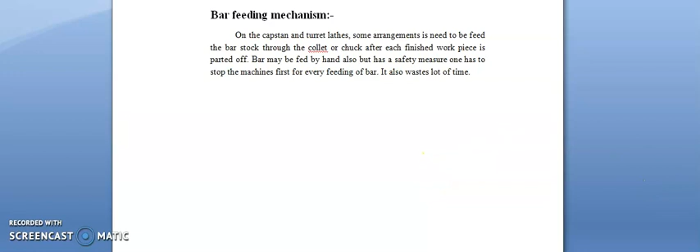One end of the chain is connected to the pin and the other supports a weight. The chain runs over two fixed pulleys. The weight constantly exerts thrust and forces the bar through the spindle. By this means the bar will be supported in a turret or capstan lathe.

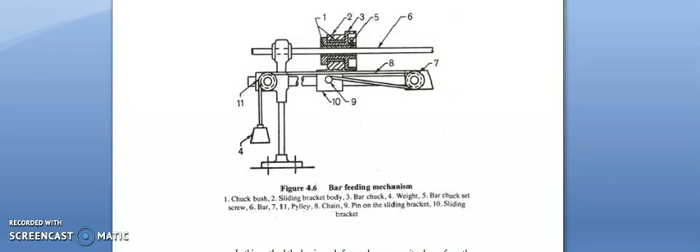Our next topic is tooling layout. Here you will see the production of a hexagonal bolt, and to produce that hexagonal bolt, how the tooling will be done on the capstan or turret lathe we will see here.

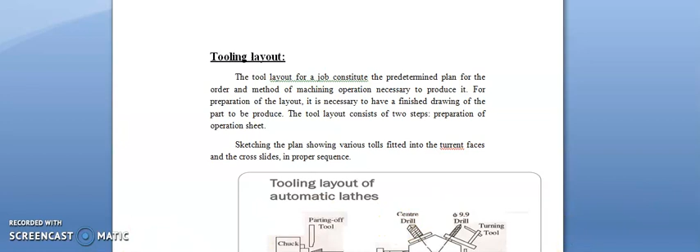The capacity chart of the machine is made available. The drawing of the finished hexagonal bolt is taken into consideration. The tools and equipment such as bar stock, roller steady turning tool holder, roller steady bar end tool holder, self-opening die head, and chamfering tools are collected. Proper feed and speed for each operation are next calculated. Then setting and machining operations are performed in the following order.

First operation: setting of the bar stop. Here we can see the bar stop. The bar stop is set at a distance from the collet face by using a slip gauge. An extra length of 10 mm for the bolt, from the bolt length, is provided.

Then the second step is setting of the roller steady box turning tool. The roller steady box turning tool is set on the next turret face for turning a diameter.

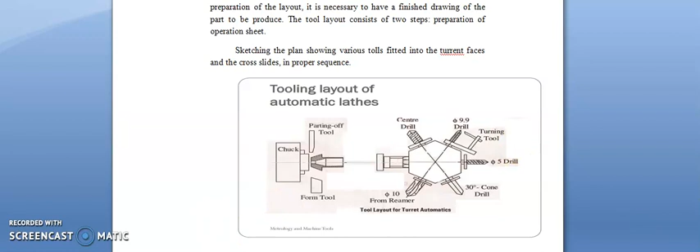Our next topic is CNC lathe. CNC means computer numerical control, and when we operate any lathe machine through computer numerical control, that is known as a CNC lathe. Physically, a CNC lathe machine is a simple lathe machine equipped with a CNC control panel.

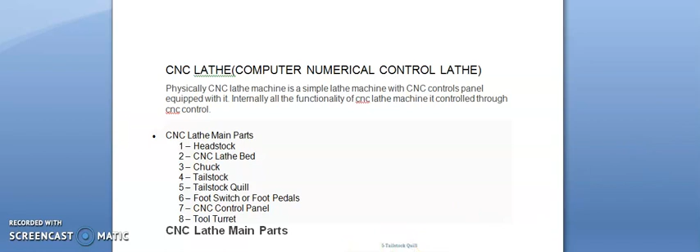Internally, all the functionality of the CNC lathe machine is controlled through the CNC control. Here we can see the main parts of the CNC lathe: headstock, CNC lathe bed, chuck, tailstock, tailstock quill, foot switch or foot pedals, CNC control panel, and tool turret. In this picture, we can see all the parts one by one: headstock, bed, chuck, tailstock quill, CNC control panel, tool turret, and foot switch pedal.

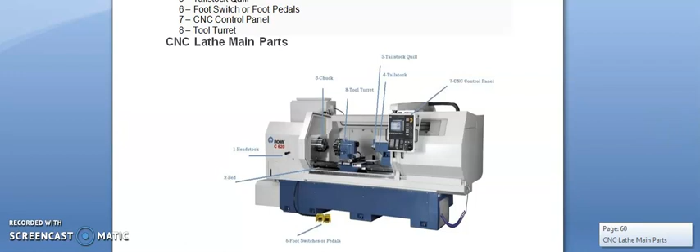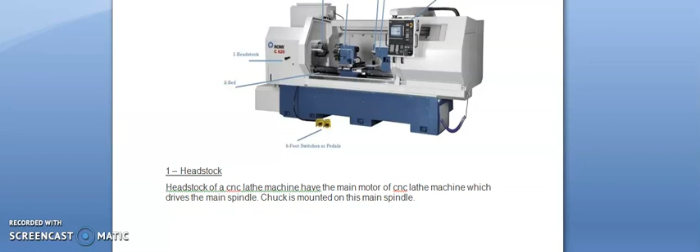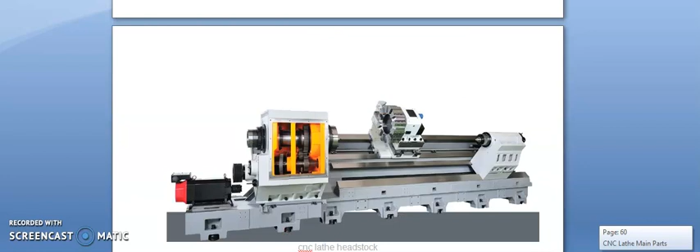First part is the headstock. The headstock of a CNC lathe machine has the main motor which drives the main spindle. The chuck is mounted on this main spindle. This is the picture of the CNC headstock. Here we can see the main motor drive and the gear drives.

Next one is the CNC lathe bed. The tool turret level and the CNC lathe bed are specially hardened so that any kind of machining cannot affect them. As we know, all the loads and vibration during the machining operation are focused on the bed, so the bed should be designed to bear all the loads and vibration during machining and also during rest time.

Next one, chuck. The CNC lathe machine chuck grips the component which is to be machined. The chuck itself has many parts. Jaws are mounted on the chuck to grip the parts. We know that in engine lathe also there are different types of chucks available, like 3-jaw chuck or self-centering chuck, independent chuck or 4-jaw chuck, collet chuck, magnetic chuck, and so on.

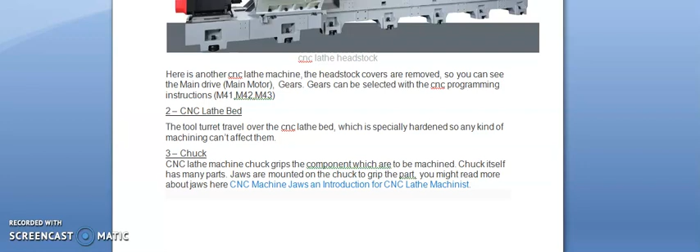Next one is tailstock. Tailstock is mostly used to give extra gripping force for the component which is to be machined. For long component machining, they provide extra force on the other end so the machining process can be completed smoothly. You can see in the above picture, at one end the chuck is gripping the component and at the other end the tailstock is providing the extra force to hold it securely.

And next one, tailstock quill. Actually, we move the whole tailstock forward or reverse, but in that way it is not used to grip the part. The tailstock is traveled to a point near the component and then set there. After that you actuate the tailstock quill, which travels either with hydraulic pressure or pneumatic pressure to grip the component.

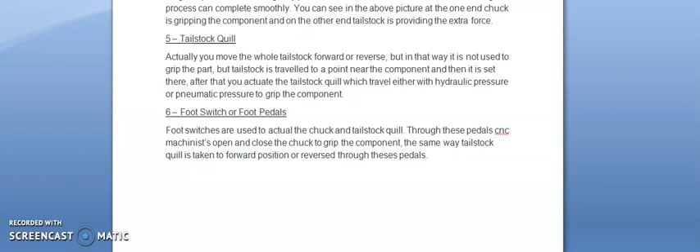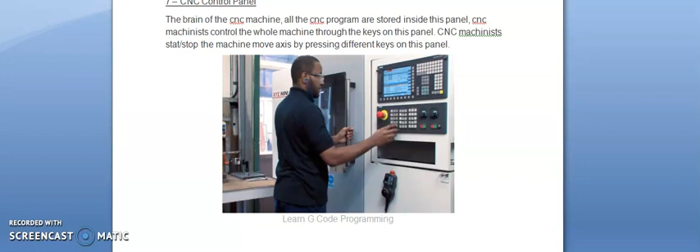Then the next most important part, the CNC control panel. All the operations carried out in the CNC machine are controlled by the CNC control panel. Here we can see the picture of the CNC control panel. The control panel is also known as the brain of the CNC machine. As our brain functions and operates all the parts of our body, in the same way all the operations are carried out with the help of this CNC control panel, and different codes or programs are written here. According to that program, the operation will be carried out.

The next one, tool turret. The tools are mounted on a turret head. The turret head is generally a multiple tool holder where more than one tool can be fitted and changed automatically during the machining operation.